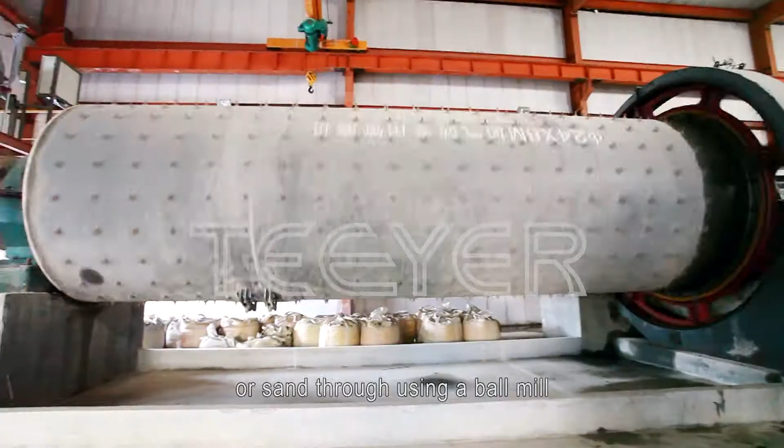The production process of AAC block and panel. The first step is to grind fly ash or sand using a ball mill and make the mixture into a form of slurry to store in tanks. Cement and processed lime are conveyed to silos for storage respectively.

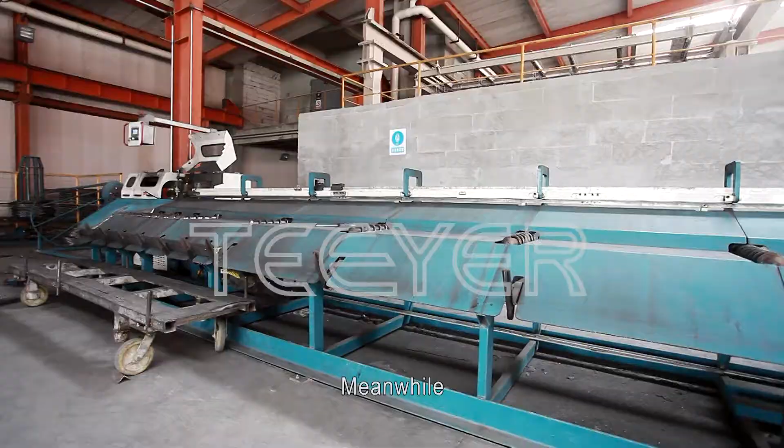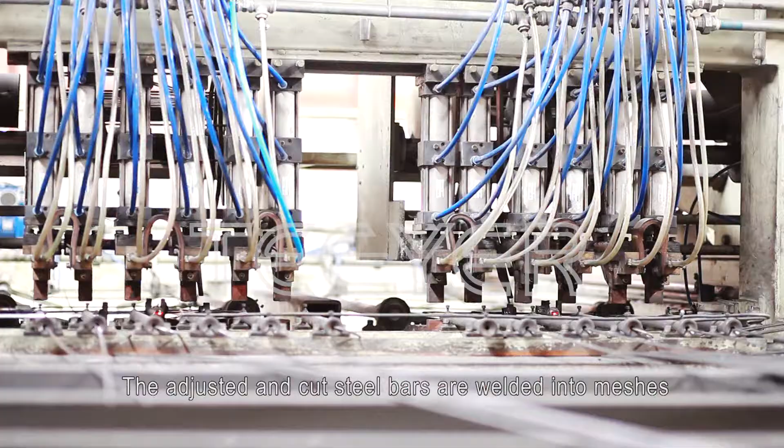Meanwhile, the wire straightening and cutting machine uncoils, straightens the steel wire, and cuts it to the required lengths for longitudinal bars and crossbars. The adjusted and cut steel bars are welded into meshes by using the multi-point welding machine automatically, or into cages by the spot welder corresponding to the desired panel size and strength.

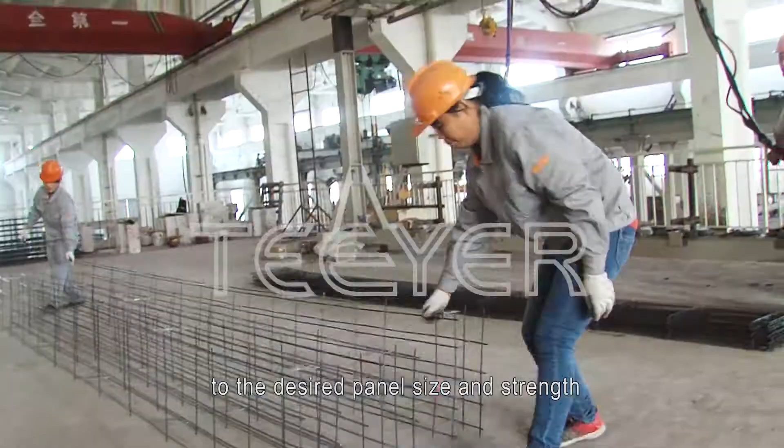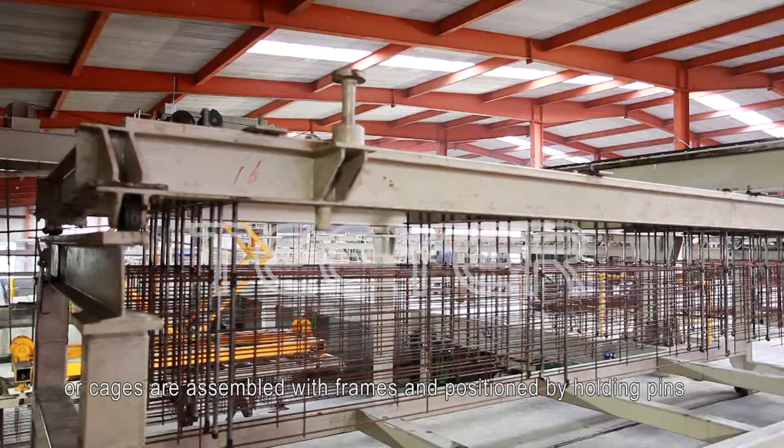After being dipped in the anti-corrosion liquid and dried in the drying oven, the coated reinforcement meshes or cages are assembled with frames and positioned by holding pins. Then, they will be lifted to the appointed position by the crane, preparing to be fixed into mold.

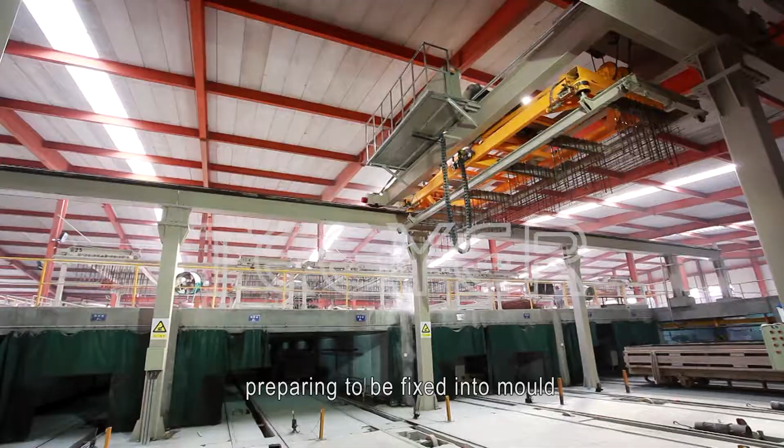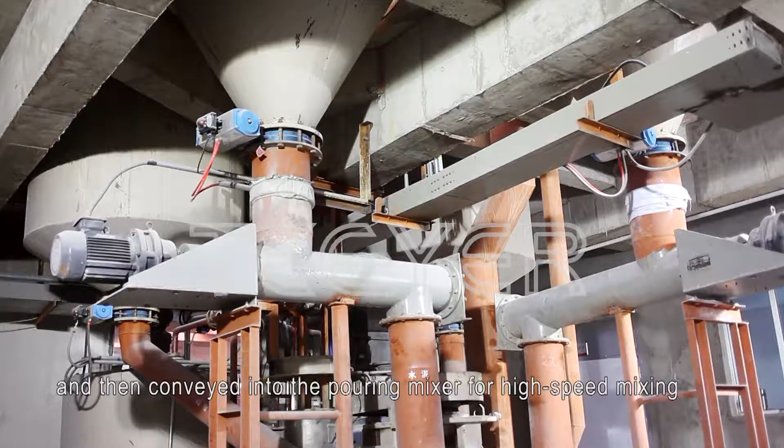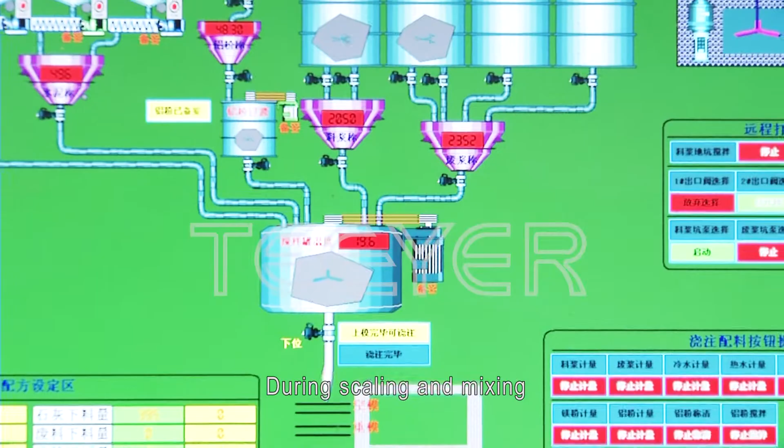The prepared raw materials shall be weighed by electronic scales and then conveyed into the pouring mixer for high-speed mixing. All of the weighing processes are controlled by the PLC system automatically. During scaling and mixing, the empty mold is conveyed onto the pouring ferry cart, preparing for pouring.

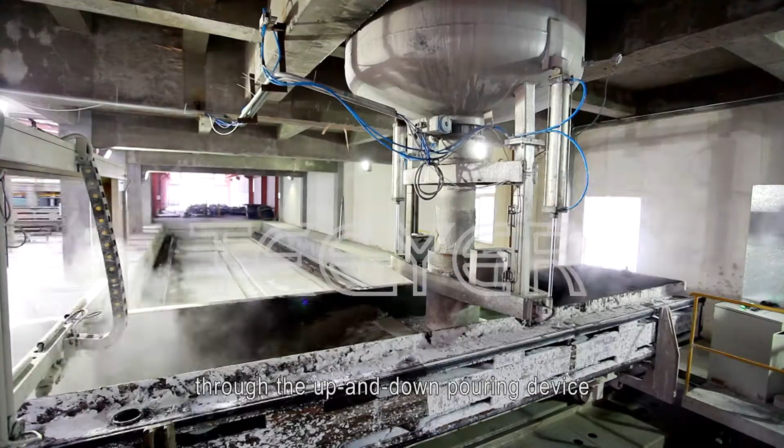The mixed slurry of raw materials is poured into the empty mold through the up and down pouring device. The filled mold is transported from the pouring ferry cart to the appointed rail. When the mold leaves the ferry cart, the bubble processing machine starts to vibrate in order to remove big bubbles caused by pouring.

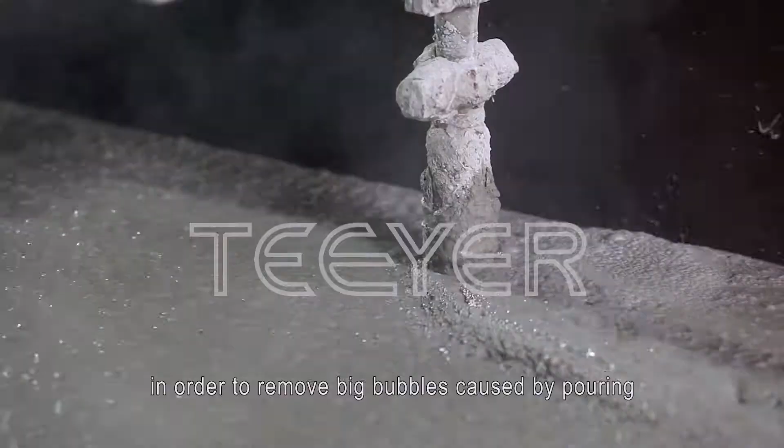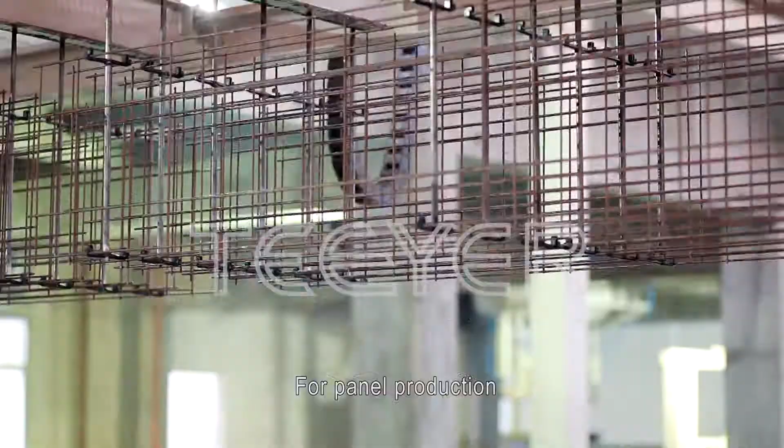During block production, the mold is directly conveyed to the pre-curing room by friction wheels for curing under constant temperature. For panel production, the mold shall be transported to the pre-curing room after meshes or cages are plugged into it by the crane.

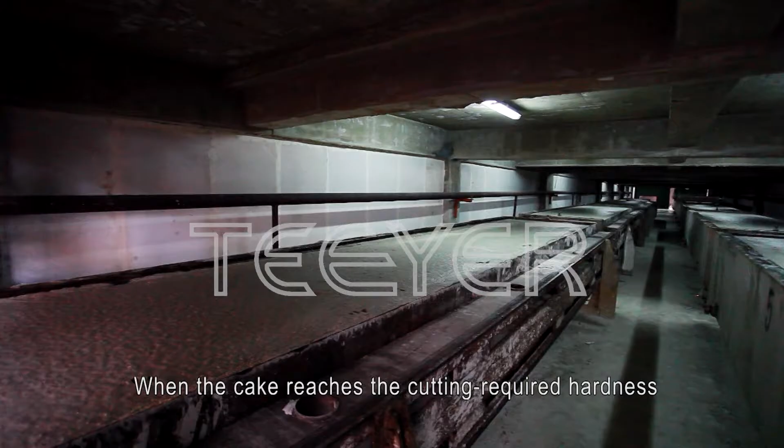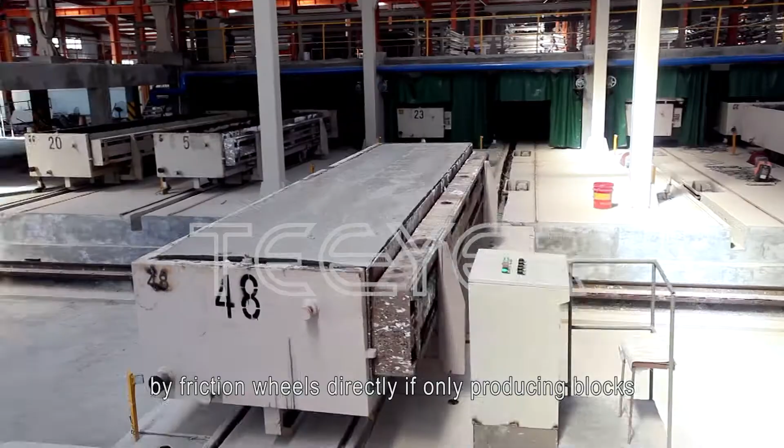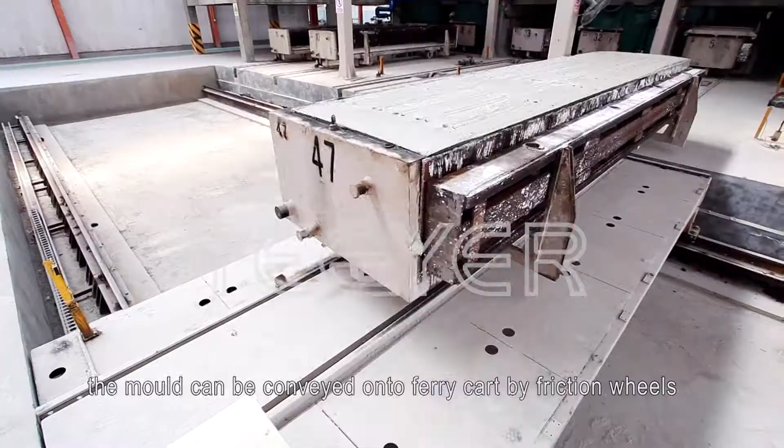When the cake reaches the cutting required hardness after pre-curing, the mold is conveyed onto the pre-curing ferry cart by friction wheels directly if only producing blocks. For panel production, the assembled frame and holding pins shall be pulled out of the mold prior to cutting. Then the mold can be conveyed onto the ferry cart by friction wheels.

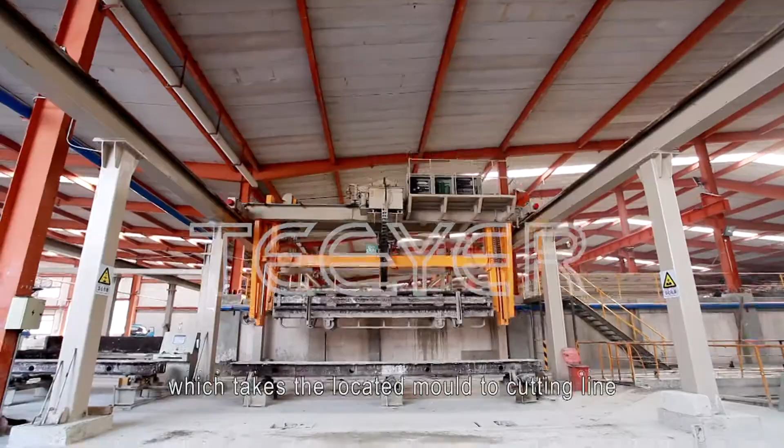The pre-curing ferry cart transports the mold to the locating position after the tilting hoister, which then takes the located mold to the cutting line. The tilting hoister turns the mold over by 90 degrees and puts it onto the first cutting cart for demolding.

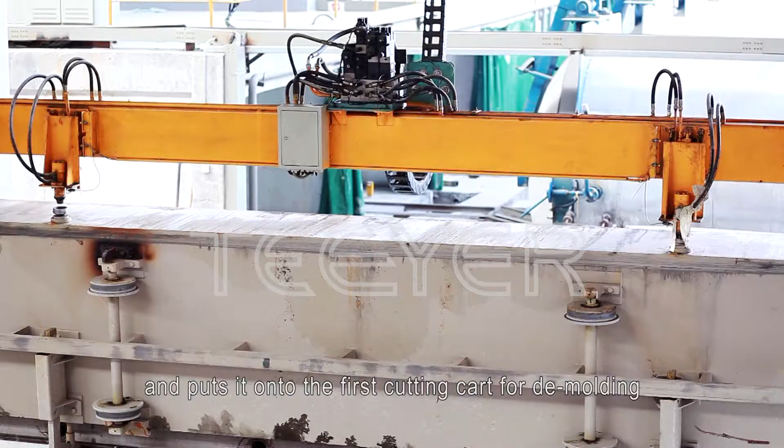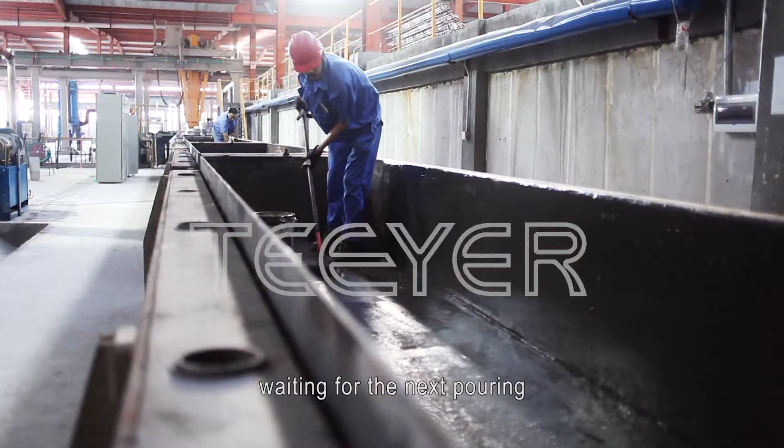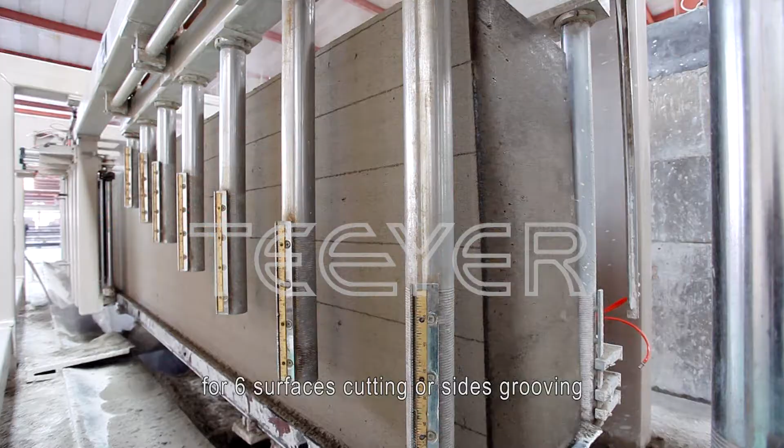Then, the empty mold will be assembled with a cleaned side plate and taken to the returning line for oiling, waiting for the next pouring. The first cutting cart carries the green cake passing through the horizontal cutting machine for 6 surfaces cutting or sides grooving. Then the green cake continuously moves to the vertical cutting machine.

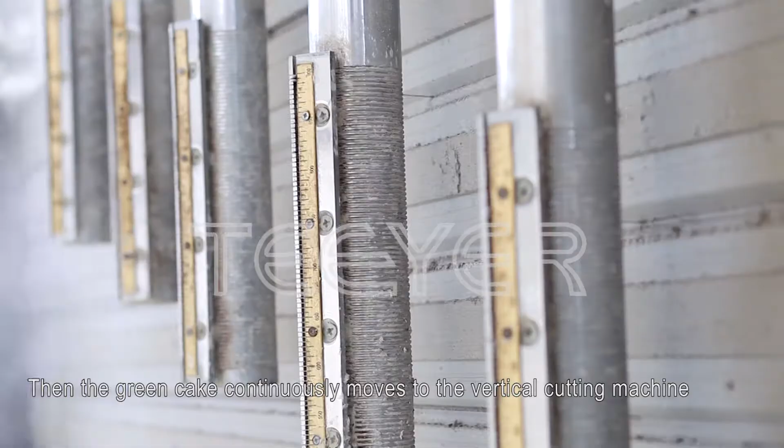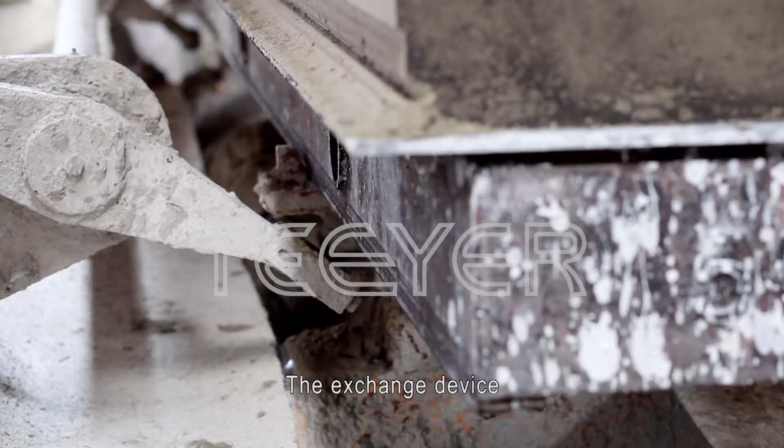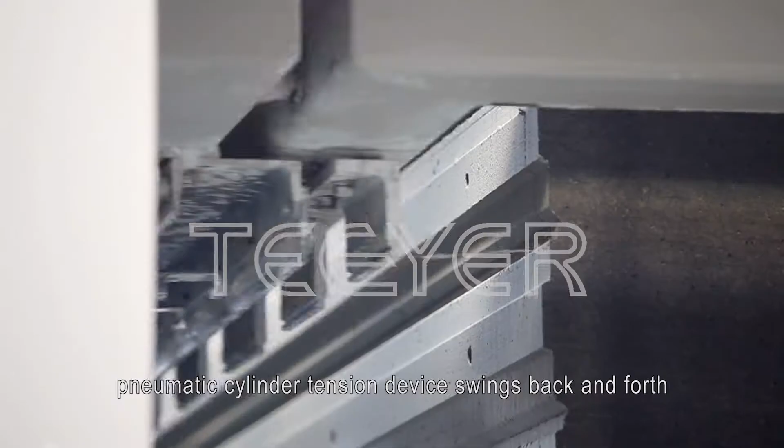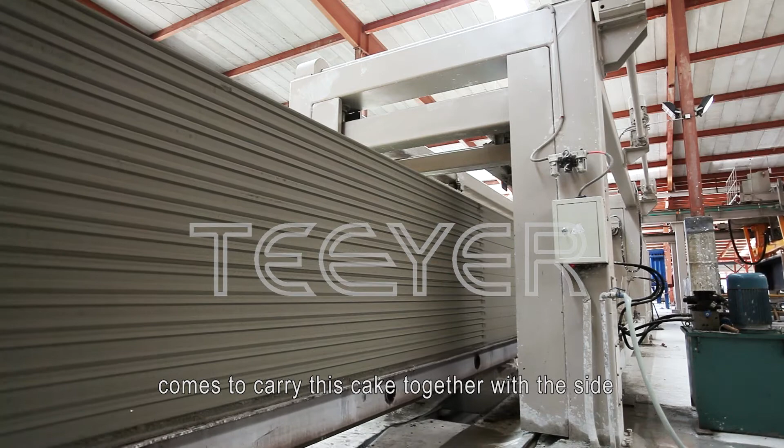The exchange device jacks up the cake as well as the side plate for vertical cutting. During the vertical cutting process, the pneumatic cylinder tension device swings back and forth. After the cutting process, the second cutting cart comes to carry this cake together with the side plate to the semi-finished product hoister, which will take the green cake to the tilting table to remove the waste at the top and bottom.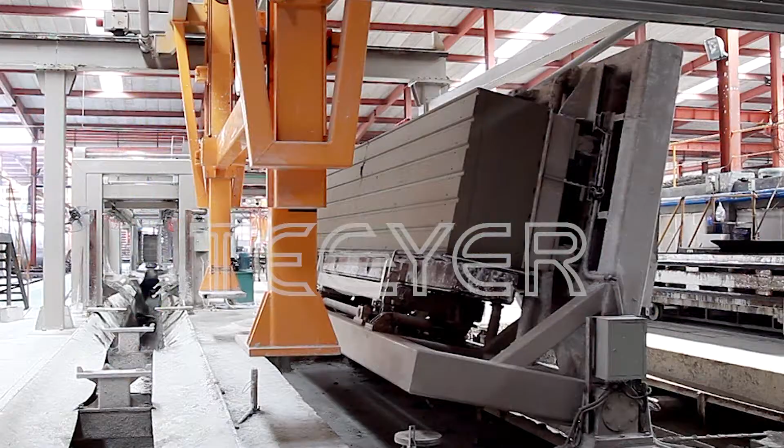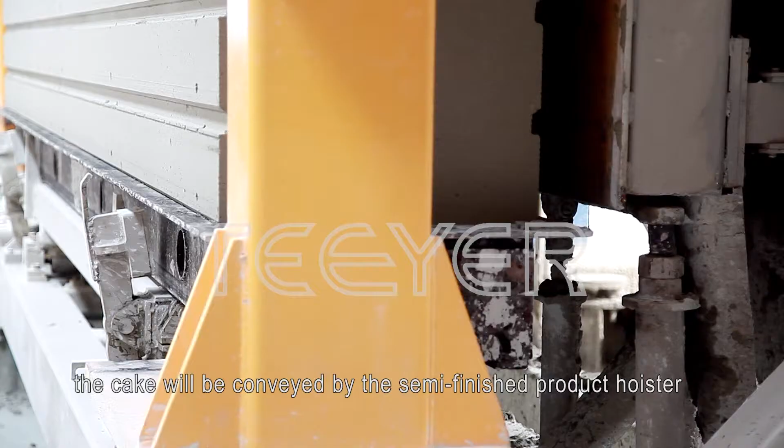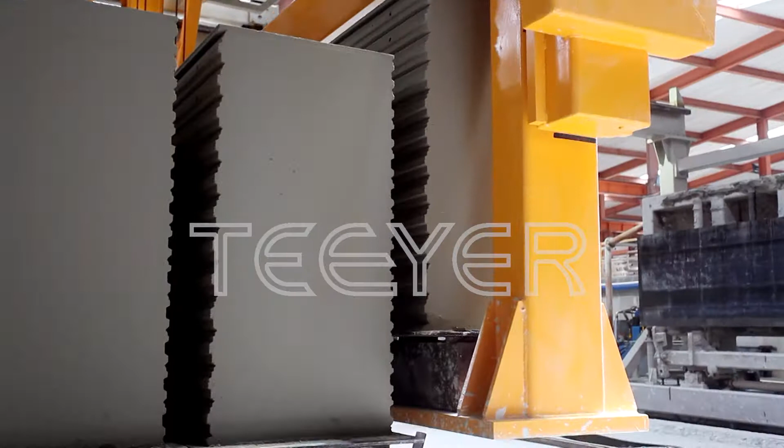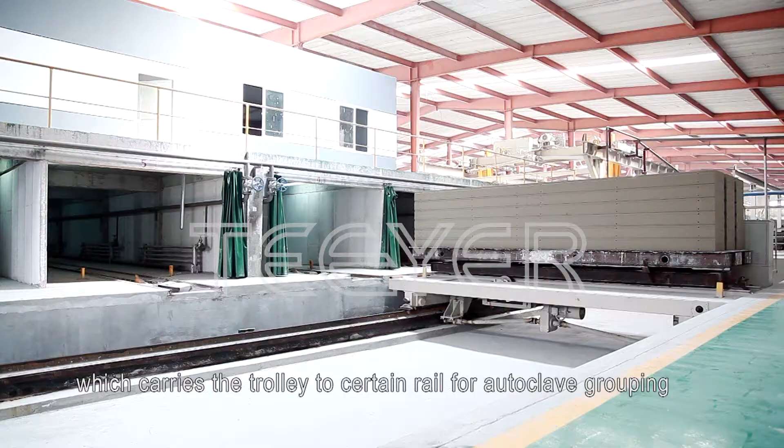After waste removal, the cake will be conveyed by the semi-finished product hoister to the trolley for grouping. The grouped trolley will then be conveyed by friction wheels to the grouping ferry cart, which carries the trolley to a certain rail for autoclave grouping.

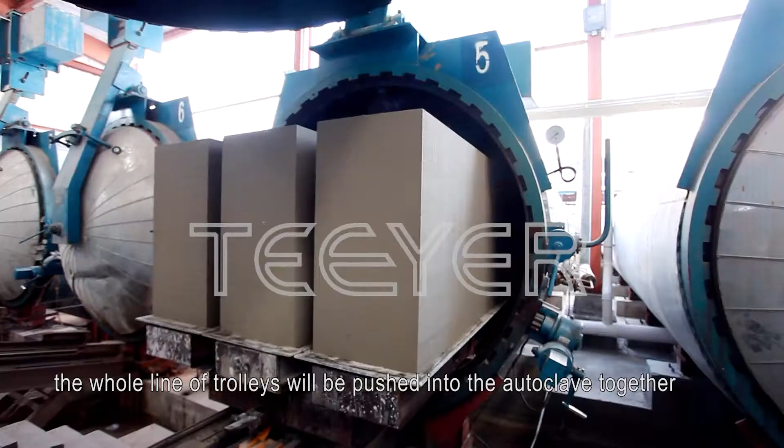After the completion of the whole grouping process, the whole line of trolleys will be pushed into the autoclave together by the drawing mechanism. The autoclaved finished products will then be pulled out of the autoclave by the drawing mechanism automatically.

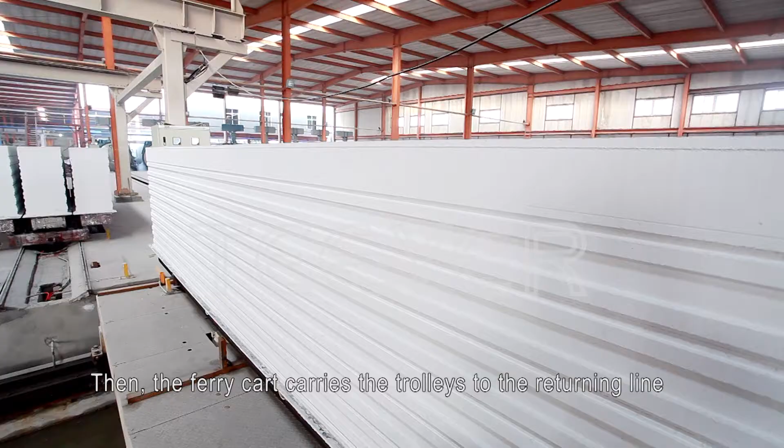Trolleys are then separated by the automatic hook releasing device and conveyed to the after autoclave ferry cart one by one by the drawing mechanism and friction wheels. Then, the ferry cart carries the trolleys to the returning line.

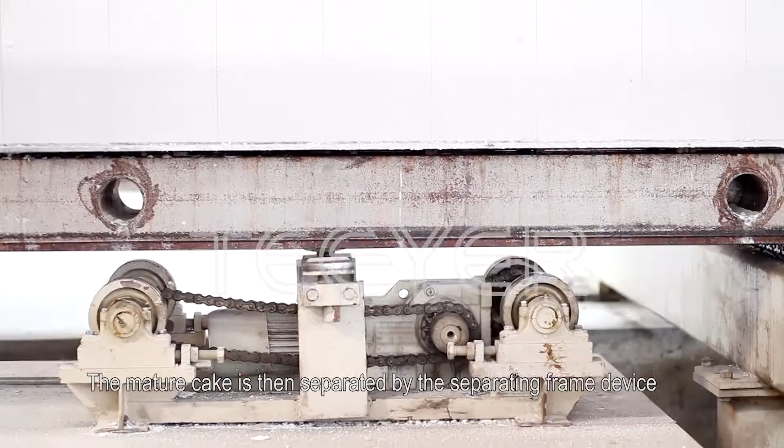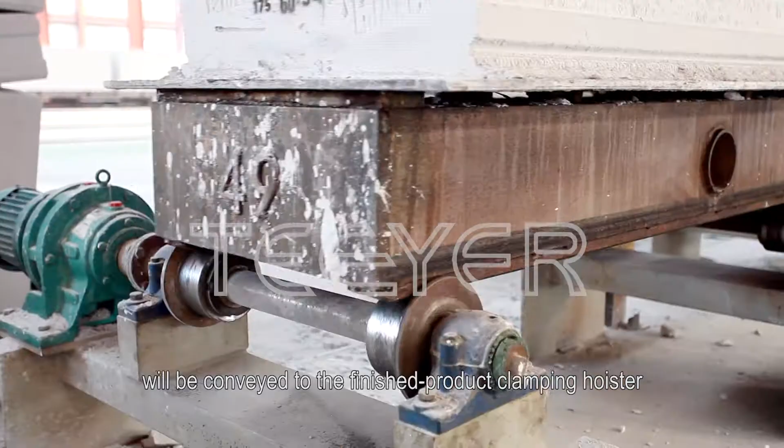The finished product loading hoister will take the mature cake onto the transverse device, which conveys it to the lifting platform under the separator. The mature cake is then separated by the separating frame device when the lifting platform elevates it. After being separated, the mature cake will be conveyed to the finished product clamping hoister by side plate rollers.

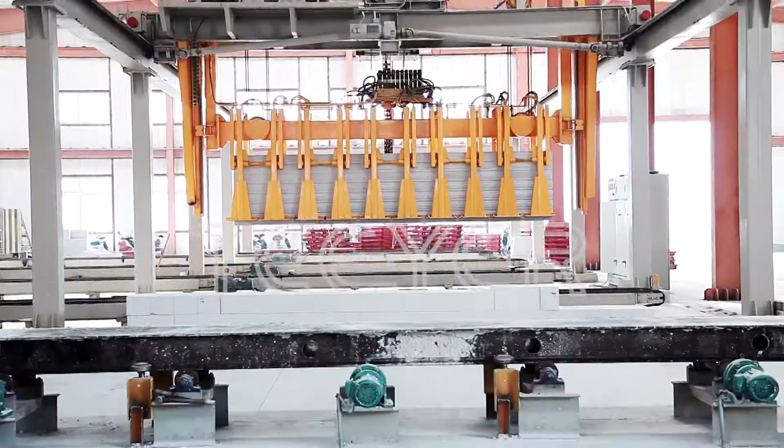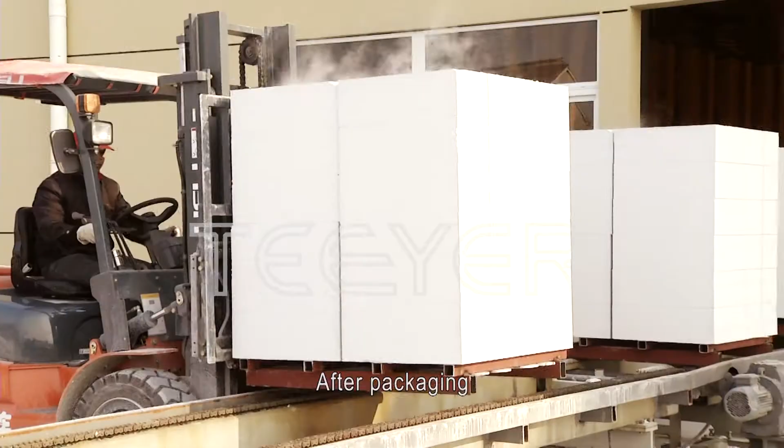Blocks and panels are then classified and taken to the packing line by the finished product hoister for stacking and strapping. After packaging, the finished products will be taken to the storage yard by forklifts or transported to the construction site directly. The processes of this production line shall be repeated continuously according to the above process flow.